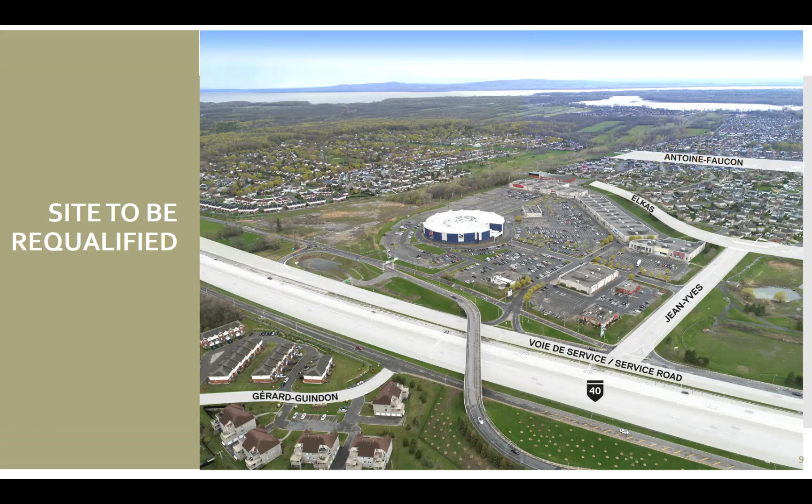Identification of the site to be requalified. So let's start with an overview of the site to be requalified. The site is bounded by Elkas Boulevard on the north, by Jean-Yves Street on the east, by the service road of Highway 40 on the south, and by the right-of-way of the Quebec Ministry of Transport on the west. It is essentially the site occupied by the RioCan Commercial Center.

The site has major infrastructure nearby, including the REM station, which is currently under construction on either side of Jean-Yves Street, and the rail that runs along the service road. The station will include a drop-off area for users accessible from the service road, as well as a bus terminal that will be located near the station.

The Montreal Agglomeration's Lien de l'Ouest project will include a pedestrian and cycling path, an access road for buses between Antoine Faucon Street and the service road, as well as the planting of trees and vegetation mostly on the west side. The project will also include a cycling and walking footbridge connecting the Grand Parc de l'Ouest on either side of Highway 40.

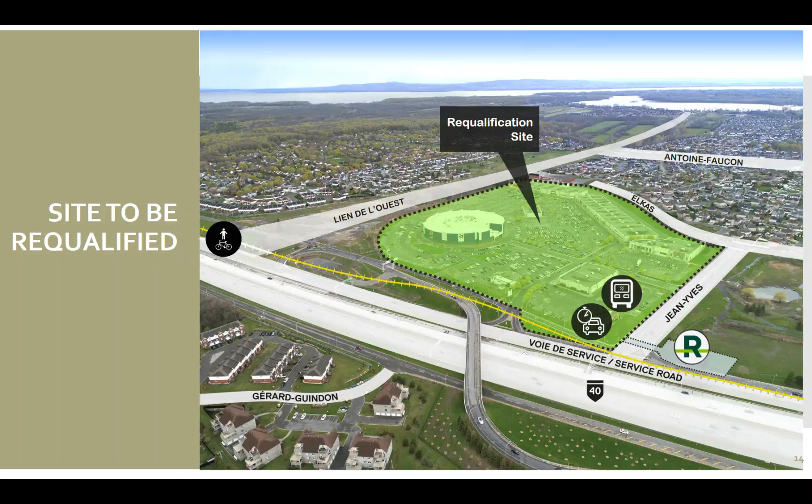So why requalify the site? There are two main reasons. The first being its strategic location. Strategic because the Kirkland REM station is a major public transportation infrastructure which will be located on the site. And strategic also because of its proximity to the Montreal Agglomeration's future Grand Parc de l'Ouest, destined to become one of the largest municipal parks in Quebec.

As can be seen outlined in green on the map, this park will incorporate a vast area that will provide high-quality recreational facilities in close proximity to our site. The second main reason to requalify the site is the unique opportunity it represents for several aspects, namely the opportunity to reinvent a complete sector and breathe new life into one of Kirkland's largest commercial centers that is currently losing momentum.

Requalifying the site will allow us to diversify Kirkland's housing offer in order to better meet the needs of our citizens in the short, medium, and long term. It is also an opportunity to revitalize a major commercial center. The RioCan site has been losing momentum for some time, as can be observed from the large number of vacant commercial units on the site. In addition, the site's large asphalted surface forms an important heat island.

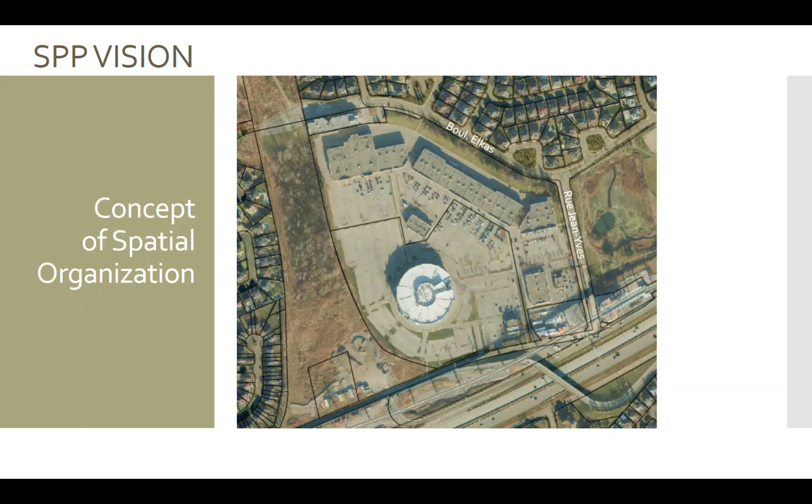It should be noted that the spatial organization plan is not a final plan. It is only shown as an illustration to highlight the development orientations which must be respected.

The first slide shows the location of the future Kirkland REM station and a conceptual projection of the street's layout.

Next are the structuring green spaces that surround the site and connect the strategic points of the site, including the public plaza, the REM station, the Grand Parc de l'Ouest, as well as Des Bénévoles Park and its surroundings. It should be noted that the green spaces illustrated in this concept are not limited to the areas shown in green. The SPP will require a very high minimum percentage of greenery on the entire site.

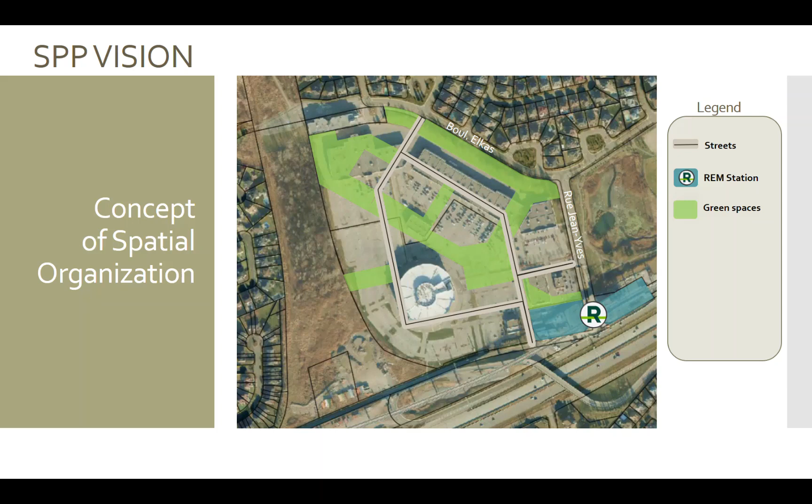Next is the public plaza. An important aspect mentioned by a majority of citizens at the participatory workshop is the wish for a lively public plaza, strategically located at the heart of the site, of an area corresponding to its vocation.

Followed by residential uses of various typologies surrounded by green spaces so as to blend in well with surrounding neighborhoods.

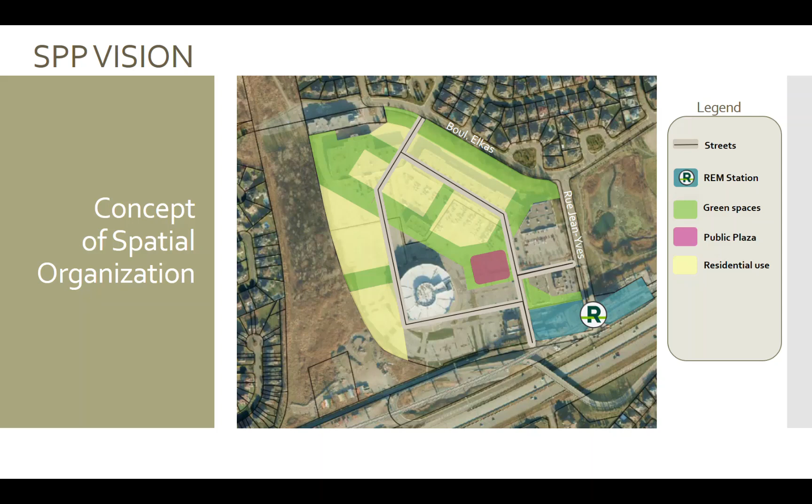And mixed uses comprising housing and commercial activities concentrated around the public plaza and the REM station. The institutional use that applies to the Margaret Manson School is preserved.

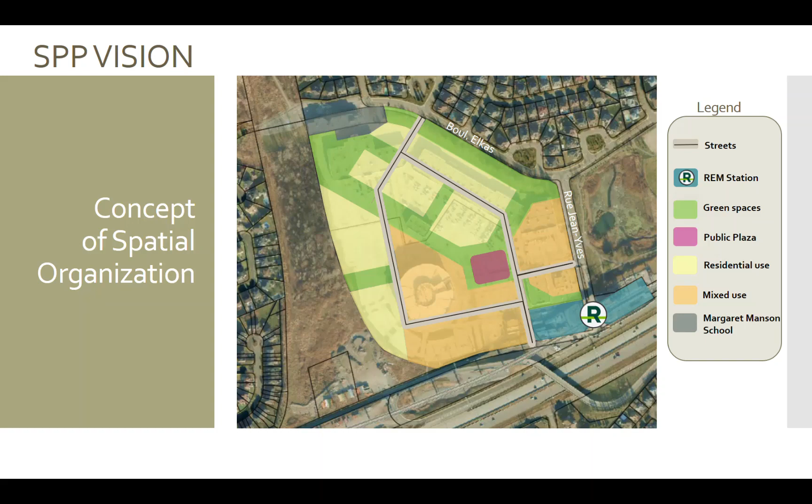Let's look in greater detail at the desired ambiances for the structuring outdoor spaces, starting with the central public plaza. It is wished that this space be a place of gathering for all citizens, with various recreational facilities to animate it all year long.

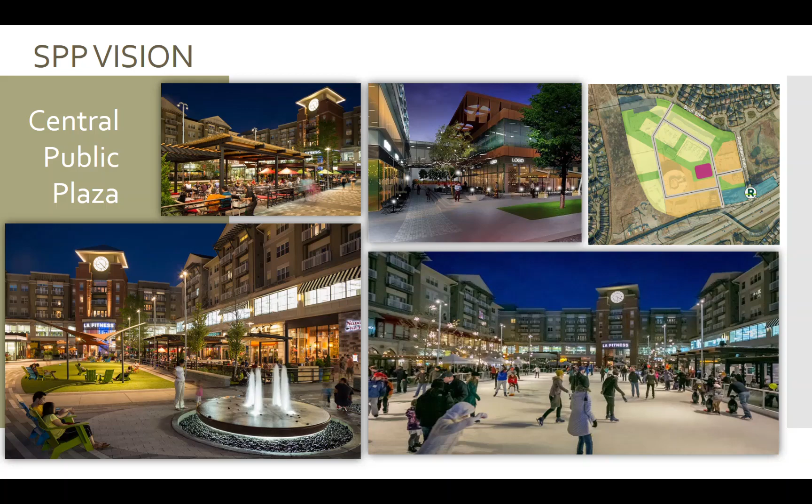Animation will also be ensured by dynamic interaction between the commercial activity and the public plaza, such as outdoor terraces, public markets, restaurants, and more.

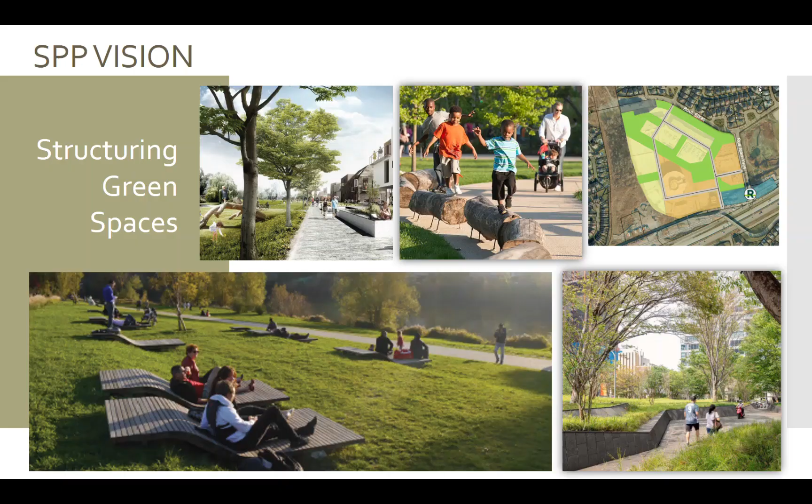A fundamental element of the SPP vision is the gradation of heights and volumes of projected buildings to ensure harmonious integration with surrounding residential neighborhoods. Let's now take a look at the 3 different levels of density proposed on the site, which are low, medium, and high.

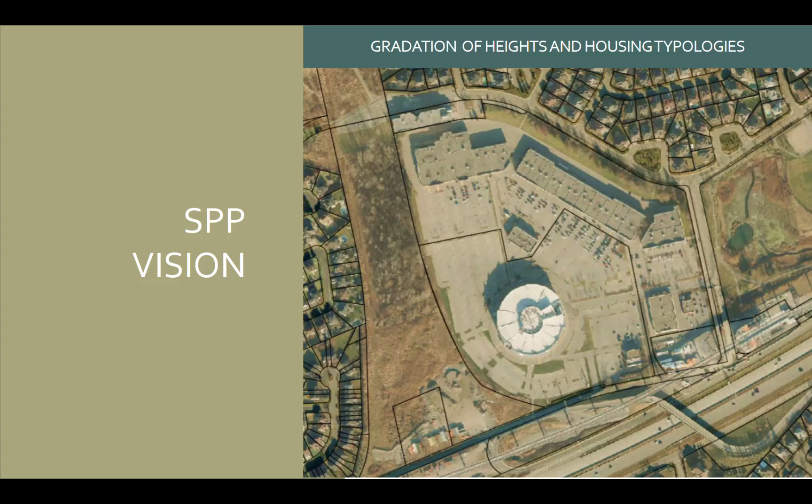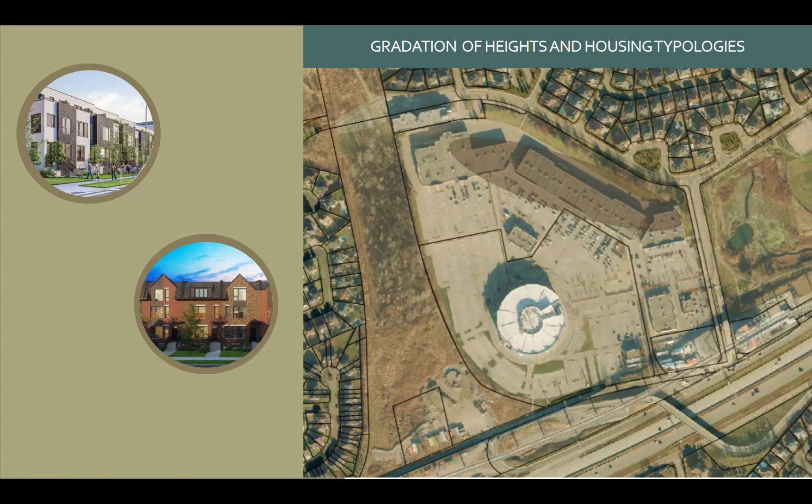In the northern part of the site, south of Elkas Boulevard, only low-density buildings, such as townhouses, are envisioned. The height of the buildings will gradually increase as we get closer to Highway 40 and the REM station.

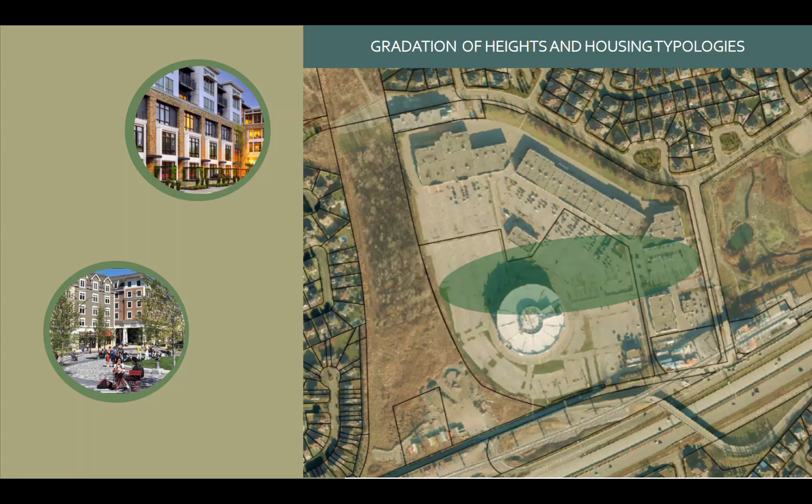Medium density is envisioned at the center of the site. And at the southmost part of the site, near Highway 40, higher density buildings are envisioned.

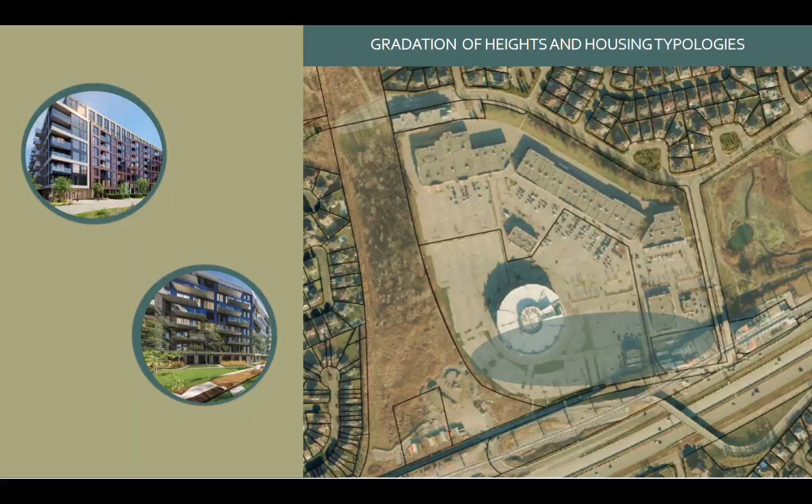Given the importance for both Kirkland citizens and the town to have access to parking at the Kirkland REM station, the Town Council demanded that the SPP incorporate solutions in this sense. Requirements of the SPP for the project will therefore include parking reserved for the use of Kirkland citizens near the station, parking reserved for future residents of the requalified site, and finally, parking to accommodate the various uses planned on the site. The whole by prioritizing underground and tiered parking lots in order to maximize the presence of greenery on the site.

To conclude, let's take a look at what the next steps are. First, we will analyze the comments sent by citizens following the viewing of this video, followed by an information public consultation session to be held with citizens this coming spring. And finally, the preparation of the Special Planning Program bylaw.